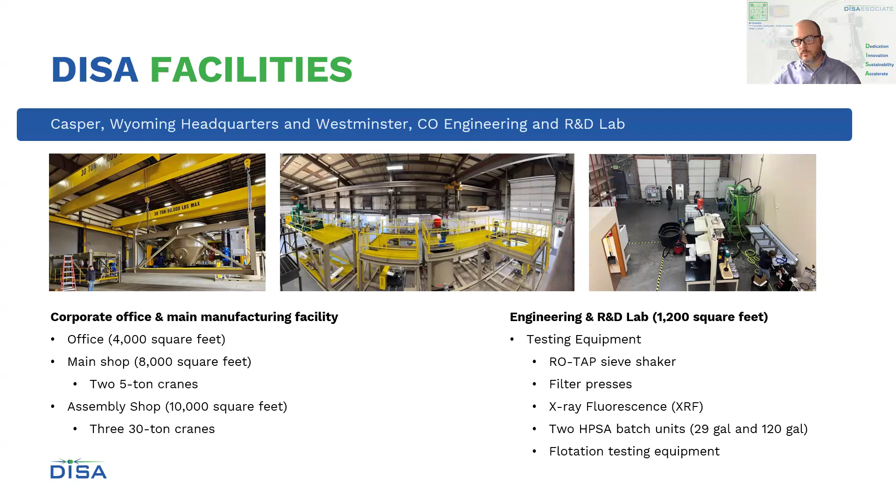So let's get into what HPSA is and really what it does. It is a mechanical process. There's no chemicals, there's no grinding media, just really controlled high-pressure collisions that are liberating minerals based on their intrinsic properties. It's a surgical approach, really, to breaking rock. It's focused, efficient, and it's also repeatable. With 5 US patents and 10 more globally, it truly is a novel way to unlock more value from the ore.

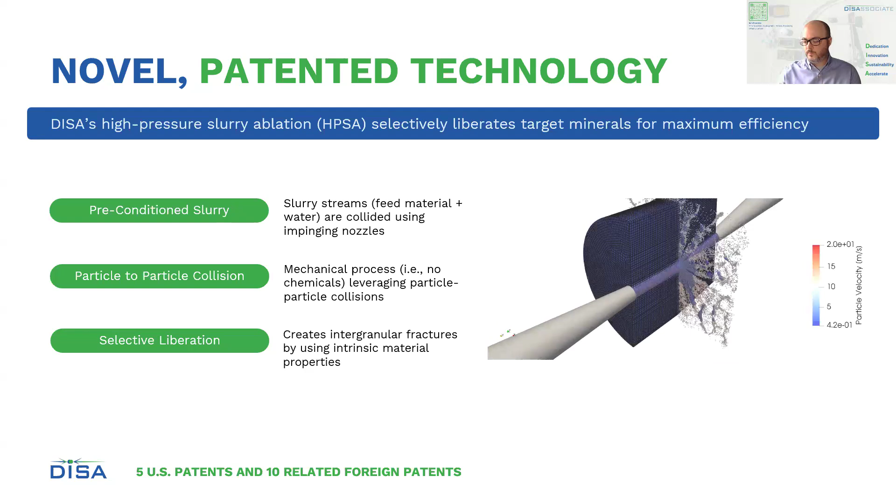And really what stands out in the chaos occurring, if you will, isn't random, it is quite precise. So the HPSA targets coarse particles, breaking them into their weakest points and leaves the fines behind. That means less grinding, less waste, and much more control of the process. And here you're seeing a visualization of what's happening as the slurry streams are leaving the impinging nozzles and colliding.

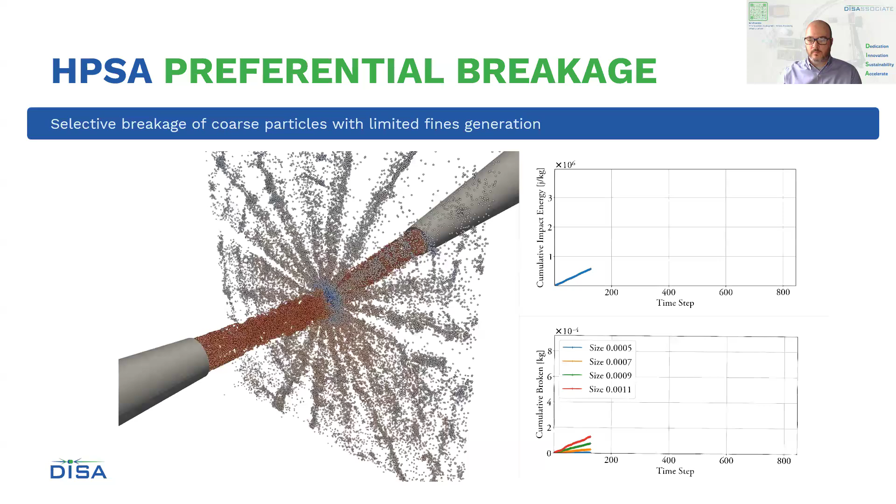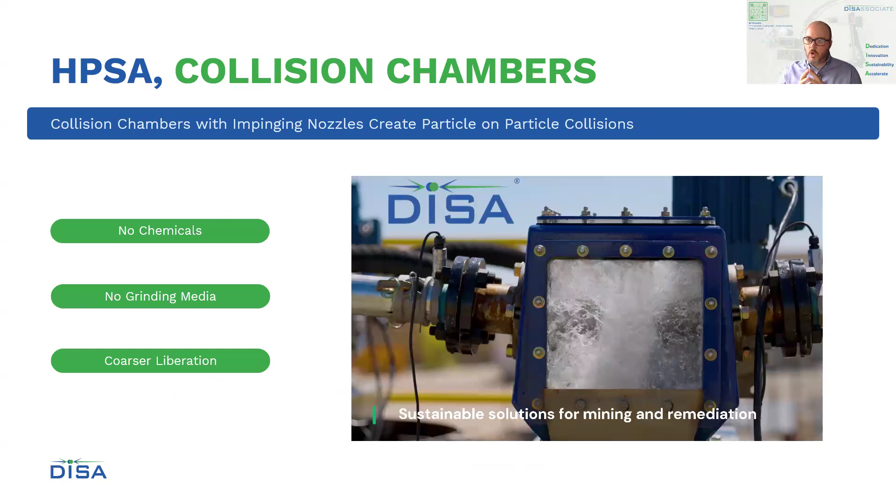So this is all happening inside the collision chambers, which you're seeing here in the animation or the video. Picture 2 streams of slurry slamming into each other with force, and precision is creating these microscopic fractures. So it's particle on particle liberation. And really that's the key to maximizing the liberation. Again, no chemicals and no grinding media is used in the process.

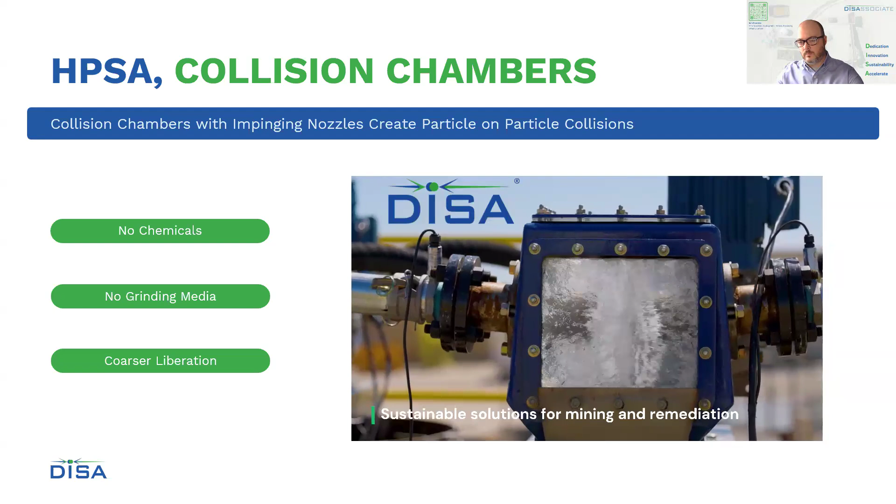So again, this isn't just a concept. It really does translate to real numbers. We see up to 80% cost reduction, 50% in energy savings, and 98% waste neutralization. So we're talking about transformation, not just in efficiency, but in sustainability.

Here's what that looks like in action. If you take a look at the copper minerals trapped in quartz and orthoclase, you can see that they're completely liberated. So HPSA breaks the bond and really sets the target minerals free. And then they can go on down the line for further processing and separation and recovery.

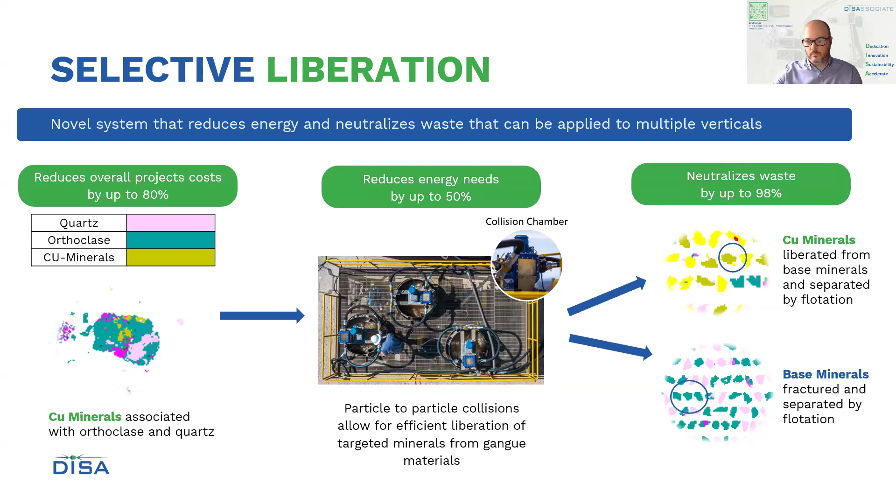Now, if we take a look at the impact of energy consumption, we know that the grinding circuits are really the energy hogs of a mine site, with up to 53% of the mine's consumption of energy. So by integrating HPSA, we introduce, or we can reduce a number of downstream units of operation. That results in a streamlined circuit and delivers more with less, essentially. And you're seeing that here, where we're able to upgrade to 75% versus 55%, and the ability to eliminate flotation banks or attrition cells, and that helps bring the power draw down across the entire plant.

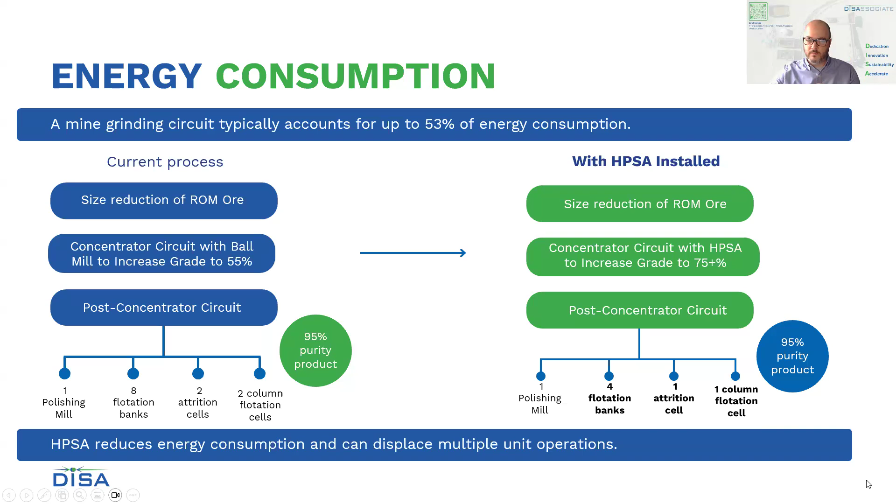So if we compare this to legacy systems, you shouldn't consider HPSA as a radical disruption, rather a safe and logical improvement. It's fewer parts, it's safer operations with drastically reduced downtime. It's cleaner, it's uncomplicated, and it's far more efficient. Essentially, we're replacing brute force with intelligent impact and selective liberation.

I mean, if you think about it, a ball mill was patented in the early 1800s, the SAG mill in the 50s, and the HPGR later in the 70s. So I think it's more about, we are ready to make improvements into the industry. We are ready to bring emerging tech to help become more efficient, bring down energy costs, create a more sustainable flow sheet, and HPSA allows us to tackle this.

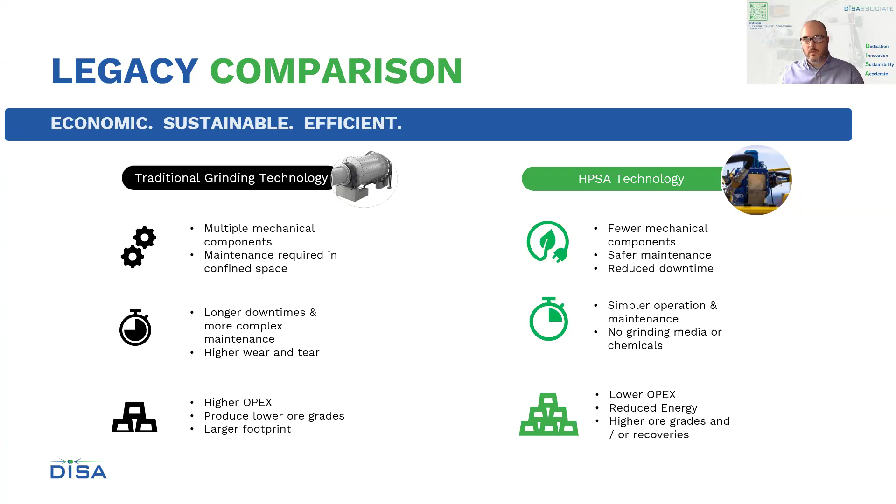Now, if you take a look at where we're at from a product development standpoint, we do have available units currently ranging from 1 ton per hour to 50 tons per hour. And we do have a number of units ready in our scale up path. Recently, we've also been awarded an $8.5 million grant through the Wyoming Energy Authority. And that will allow us to now really ramp up scale and bring larger units online here later this year and into 2026.

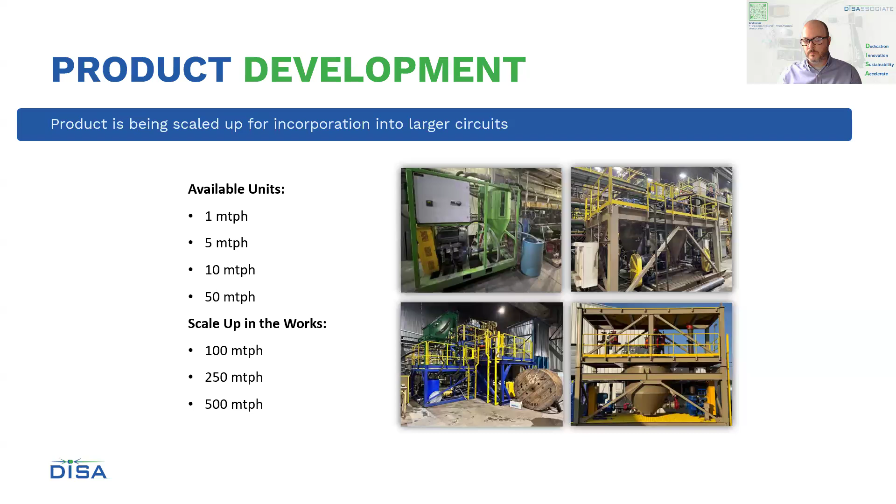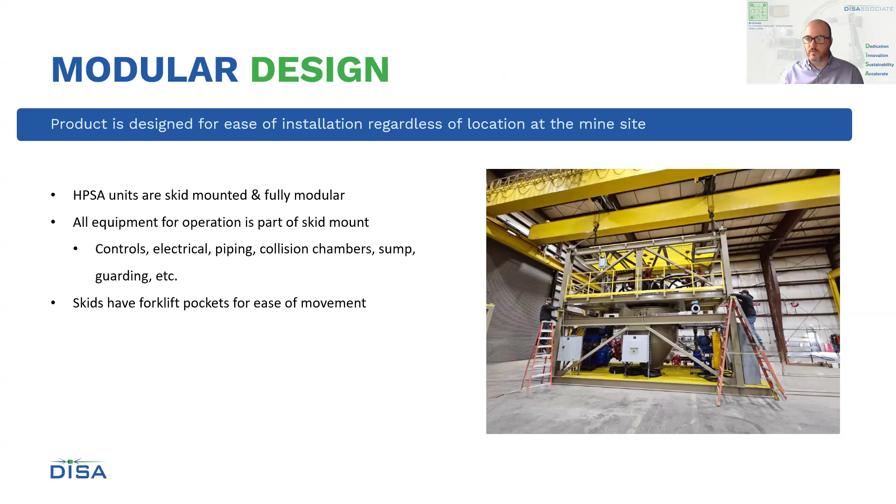From an installation perspective, it's really a plug and play system. The units are modular, they're skid mounted, forklift friendly. Everything really that you need is built in, the piping, the controls, safety features. There's no foundations required. As long as we've got a flat, stable surface, then away we go.

And then once it's on site, it's extremely quick as far as getting from installation to hot commissioning. It's clean. It's really designed to minimize downtime and maximize results. We're really wanting to not be intrusive of the existing operation, especially when we're talking brownfield. We want to take in the incoming slurry, and then we have an outgoing slurry as well, which can go down further in your process.

So really minimizing disruption to current operations allows us to come in and test and move into multiple streams across the flow sheet as well, with minimizing disruption to the day-to-day business.

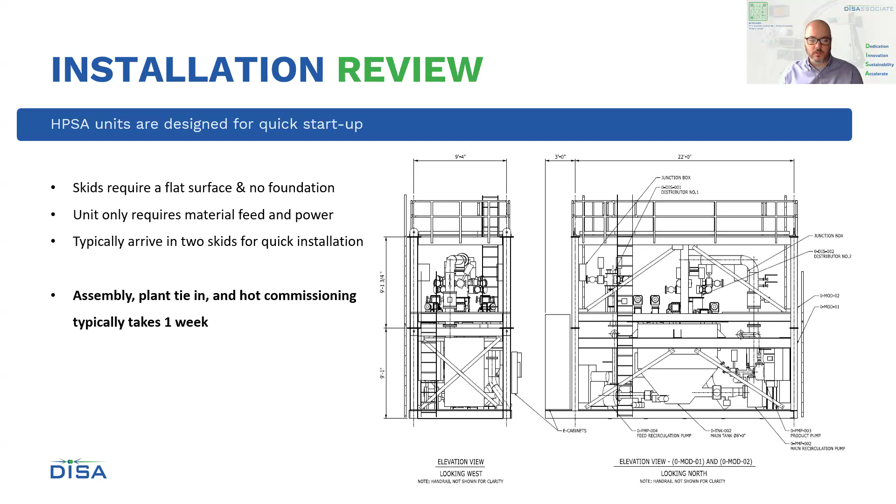So here's how our full circuits look at scale. These are 10 ton per hour units that can go out into a remediation, a waste rock reclamation site, and operate as a full circuit. They can also be integrated seamlessly into an existing circuit, relatively small footprint with a really significant impact.

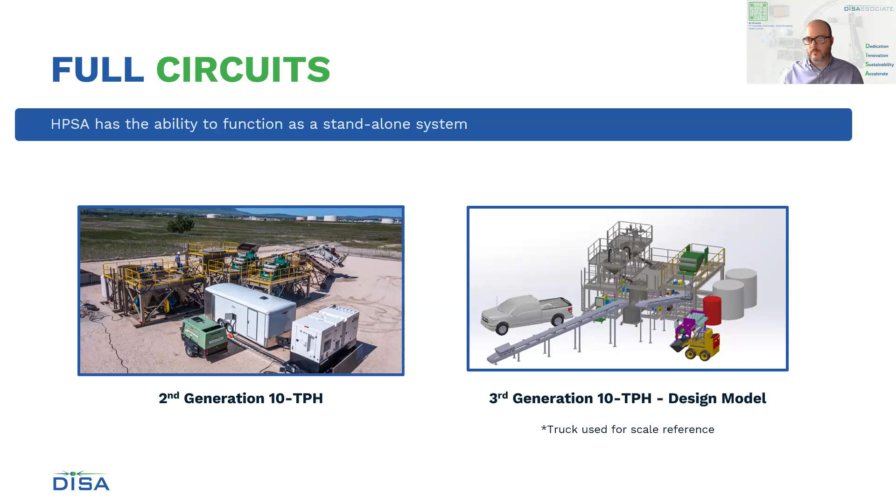HPSA has been proven quite successful and has shown amenability across a variety of ores. More than a dozen applications have been tested to date. Not every application behaves the same way in every deposit or geography, so there's still plenty of test work to be done and opportunities to do that. But I think we've proven to date that it's quite amenable across a variety of ore types, and we continue to add to that list. The lab is busy month to month, and we welcome the opportunity to test more ores from different deposits as well.

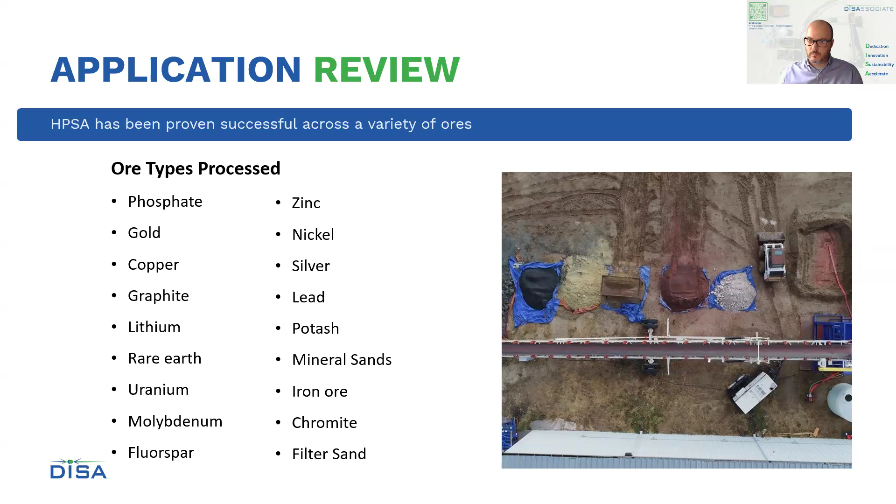HPSA also handles a wide range of conditions. From a percent solids perspective, anywhere between 0 to 55%, which is essentially what the centrifugal slurry pump can handle - that's what we use to pump the slurry through the impinging nozzles. From a PSD perspective, you're looking at 10 millimeter to 20 micron based on the current scale of our units. As the units scale up, so too our ability to take larger top sizes, which will avoid plugging the nozzles. So with scale up will come a bigger range of PSD and solids handling capability. Today, the size reduction ratio is roughly 10 to 1, but that often depends on the cut size, which could allow it to be even greater.

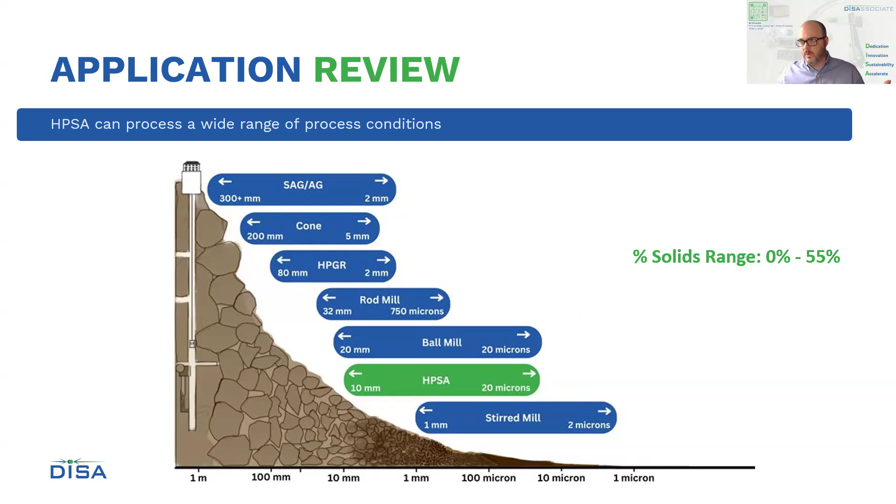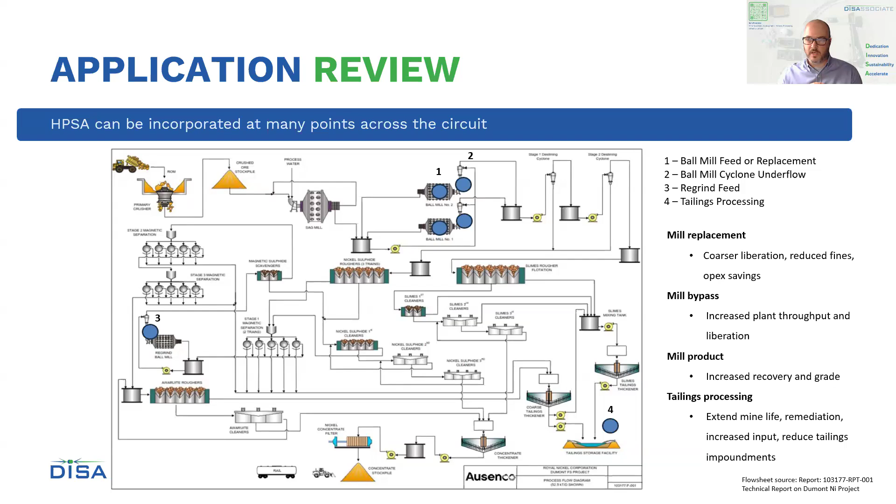From a placement perspective, it's really the client's call in the end, whether it's feed replacement, cyclone underflow, or tailings. HPSA is flexible in the sense that we can find where it best fits in a circuit and apply it where it's going to have its largest impact on a flow sheet. Really, it's like a Swiss Army knife, extremely versatile. Think of it as a process improvement technology, not so much a direct replacement of existing grinding technologies - it really does work in unison. Whether that's mill bypass to increase plant throughput and liberation, or extending mine life by looking at remediation and reducing tailings impoundments, it's quite flexible. When we get a unit to site, because of its modular design and relatively easy plug and play setup, we can move it and test multiple streams.

From an on-site testing perspective, we have the ability to bring it on site and quickly test multiple streams. The units are skid mounted with forklift pockets, and really just need a power supply and a simple tie-in. This allows for real world testing on the site's materials, right at the site, with quick results, a small footprint, and minimal disruption. Especially if there's a lab on site, we can get results from our testing much quicker than going back and forth with samples to our lab in Colorado. So we often encourage bringing a unit to site and conducting testing there to speed up the results cycle and get better, quicker feedback.

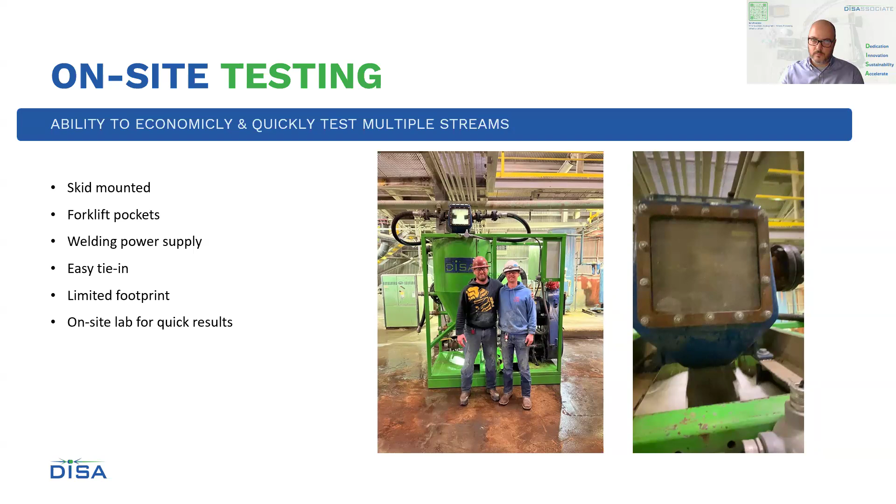Just before we dive into some of the results, a quick note to mention that the case studies are based on real testing. They're anonymized to protect client confidentiality, but the numbers are real and the sites are real.

So we proved that works at 3 different sites, and we continue to explore opportunities to expand this business and really make a significant impact on some of these waste streams that have been left behind. In the US alone, there's over 15,000 abandoned uranium sites. And quite frankly, it's time to clean it up, take the good stuff out, and leave unleachable, uncontaminated material behind,

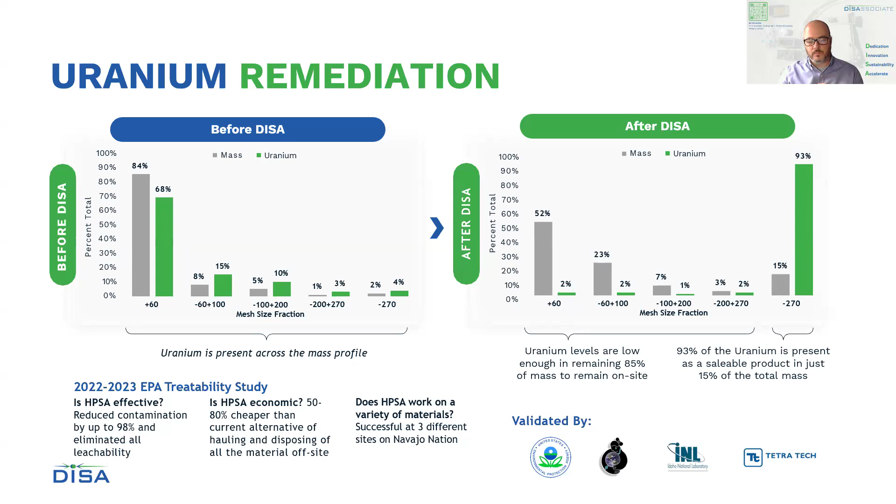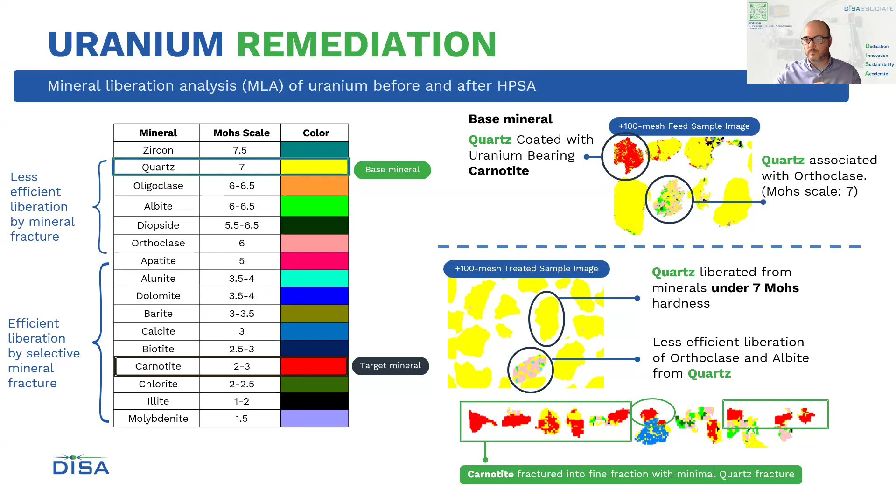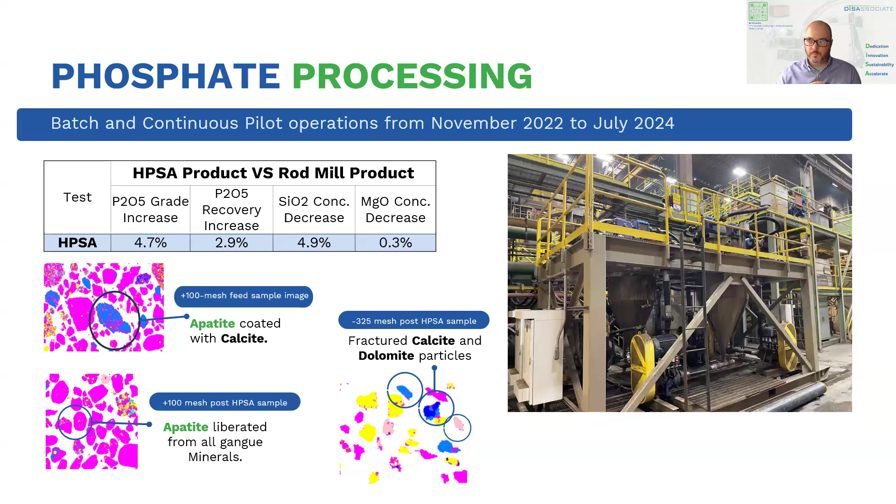In a separate, more recent on-site test, which happened earlier this year, we witnessed again 15% more P2O5 and over 50% less MgO in a regrind stage. So better concentrate, lower penalties, extremely beneficial from an economic standpoint across many of these case studies, not just phosphate, where you're able to increase profit margin per year into the millions, lowering operating expenses, earning a higher dollar per ton, and operating more efficiently.

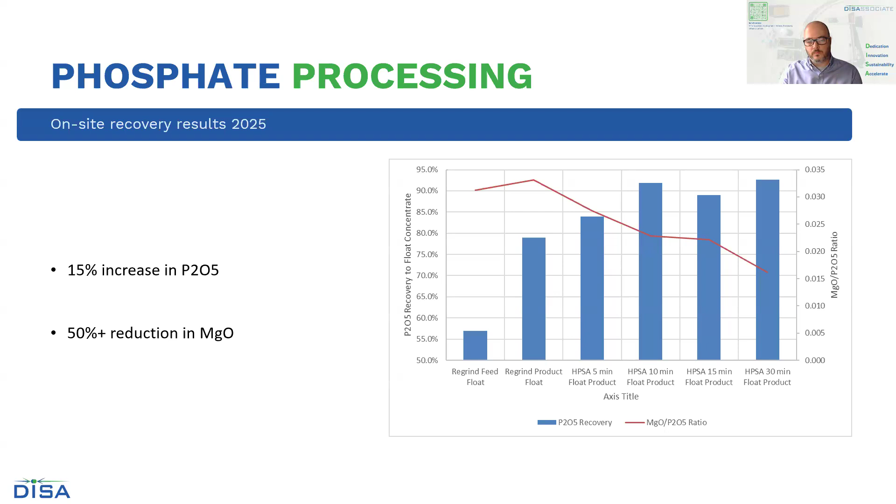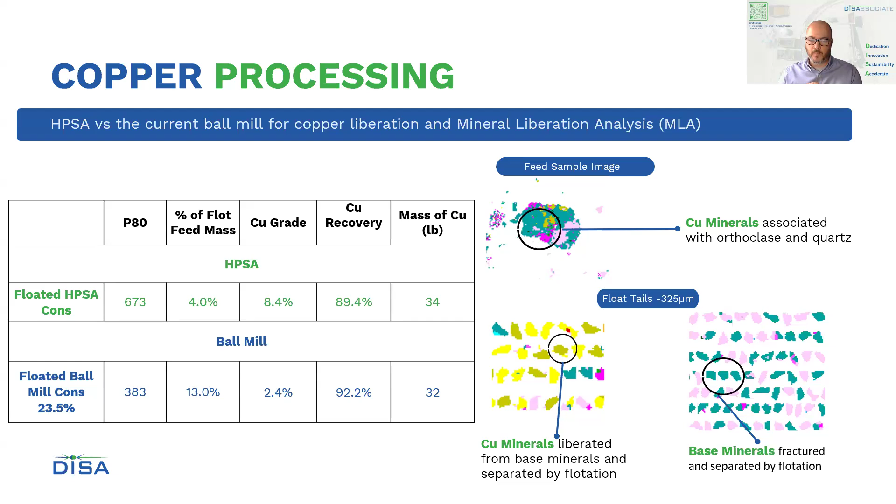So significant strides in copper testing thus far. Again, many more applications to test, more materials from different geographies, but early indications show significant efficiency gains, recovery gains across copper.

If we look at copper nickel, a similar story here, where we're consistently able to outperform traditional methods. In one test, we saw more than 2% increase in nickel recovery and over 1% in copper. It's really a huge lift without changing the rest of the plant.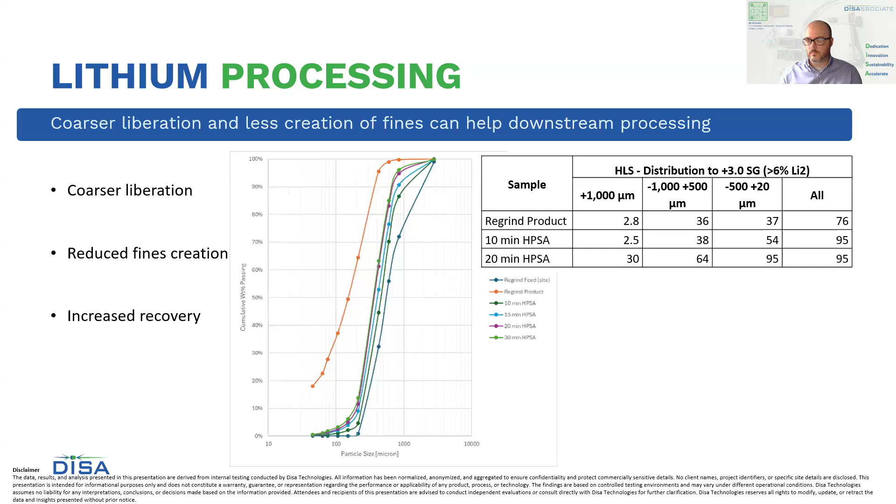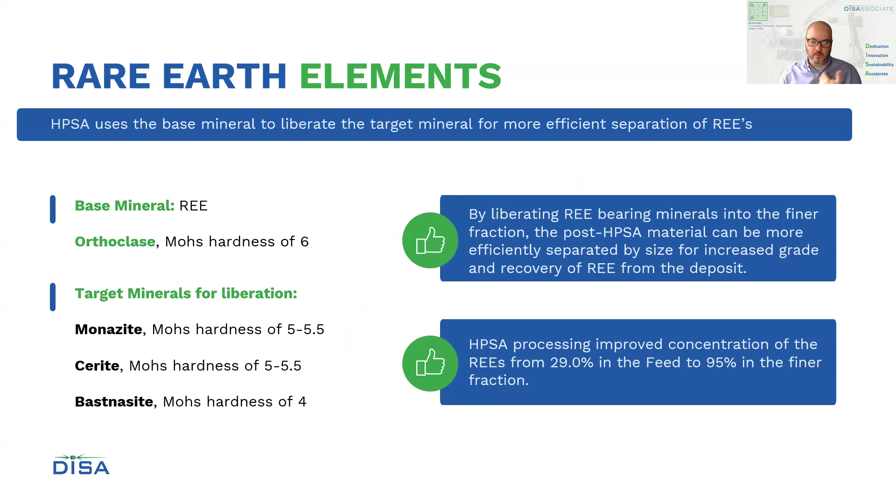Now let's talk a little bit about rare earths. These minerals are embedded in harder matrices, but HPSA is using the base minerals themselves to liberate the valuable REEs. So you can see here where we are able to boost REE concentration from 29% to 95% in just one case alone here. That is extremely precise liberation.